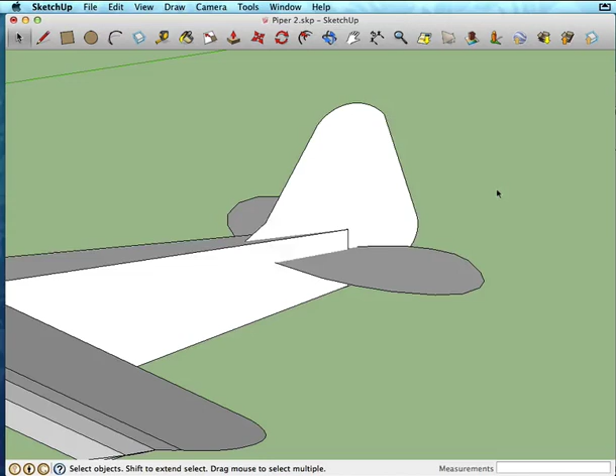In this part, we're going to finish up our tail section here and hopefully have time to do some basic unfolding or flattening out. So let's just get right into it.

I'm going to use the Spitfire's tail design as inspiration for this, where I'm basically going to have the hinge line run right along here, and I'm going to have this relief cut area to allow the elevator hinge area to run through here.

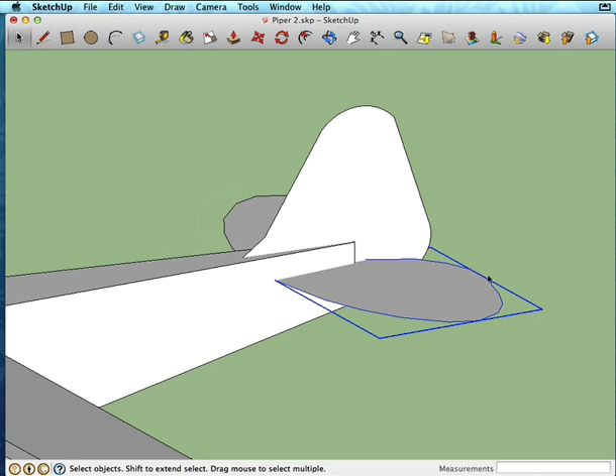Looking at the way the horizontal stabilizer kind of links in with things, I'm going to try and emulate that as well. That should make it a little easier to actually build this particular model once we're done with the plans. So first I'm going to go ahead and divide up the tail.

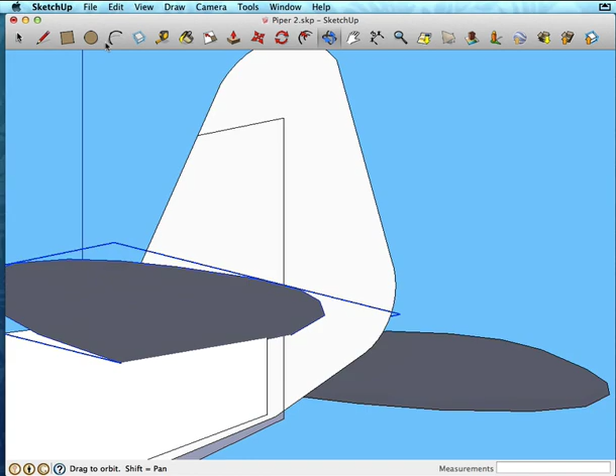I'm going to want to run my hinge line right up along, let's say, that area, and I'm going to bring this straight across to that edge. Now I'm going to make a reference mark here right above, and take it down, so it's going to be right below that elevator area.

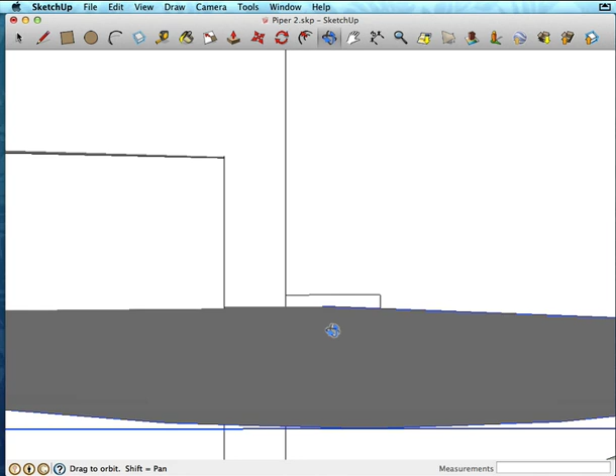While I'm here, I'm going to go ahead and use this hinge line to try to line up the hinge for my elevator. We're going to say that it is going to line up right about there, and go all the way to there.

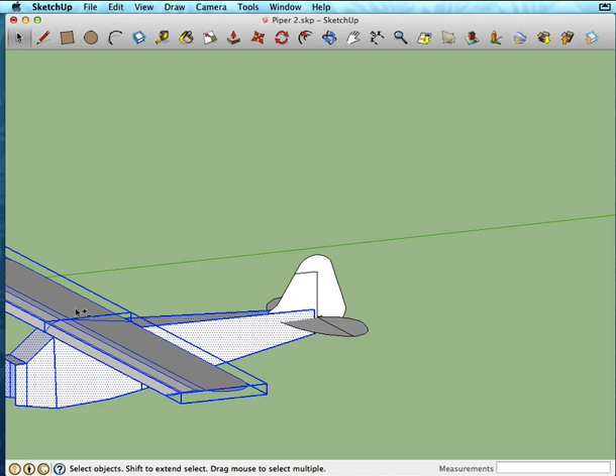Now let's go in and refine that. So I'm going to select everything except for my tail assembly. Actually I've got those in groups, so let me just select these guys and hide them. Now I can focus on this.

I'm going to actually hide my horizontal stabilizer here. Let's split that. Actually, before I explode that, let me hide it. I actually want to make that line here in the component, so that it goes all the way to...

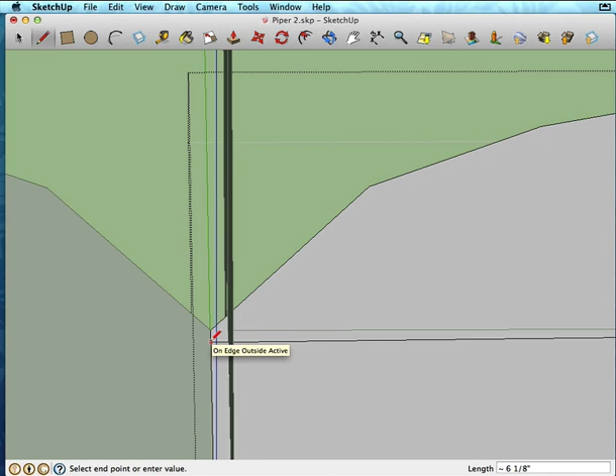Actually, looking at where I've got that split, I'm going to revise that shape a little bit. So let me get rid of that, and I'm actually going to pull this further back a little bit.

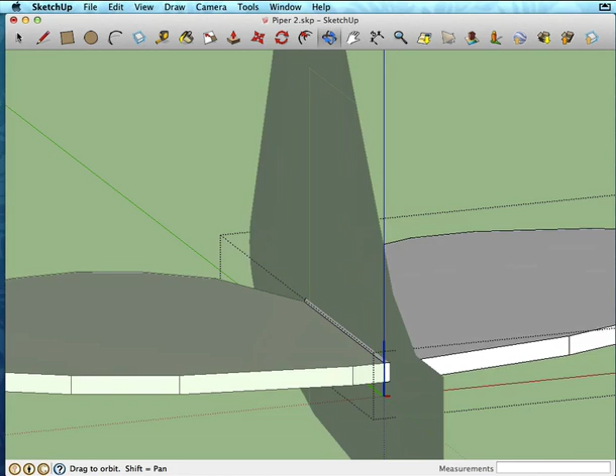Let me just pull that up so I can easily hide this, and then just kind of scale this side panel for my needs. Let me pull this back here to about... that looks good.

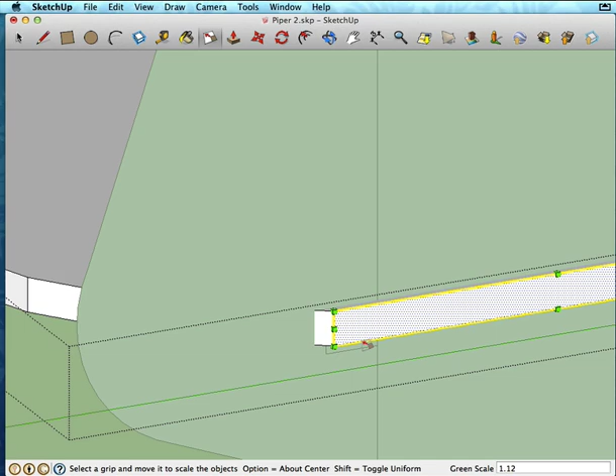And now that I've got that scaled, I don't actually need this geometry up here, so I'm just going to kind of get rid of some of these extra lines.

There may be times when you're designing your model that you'll find it hard to manipulate a certain facet or area, and it can be helpful to just go ahead and pull in some geometry using push-pull to get some thickness to it, which gives you a bigger, easier to manipulate area.

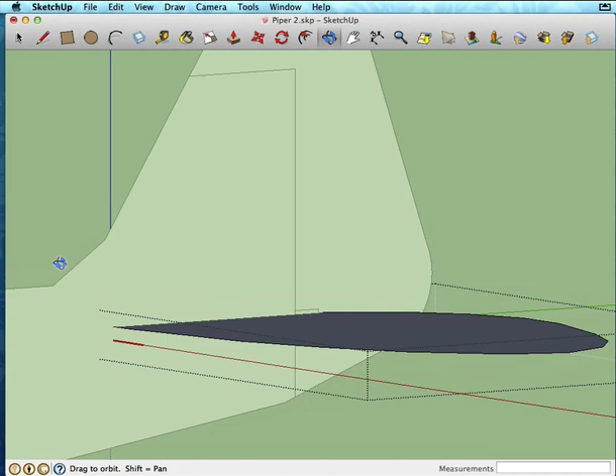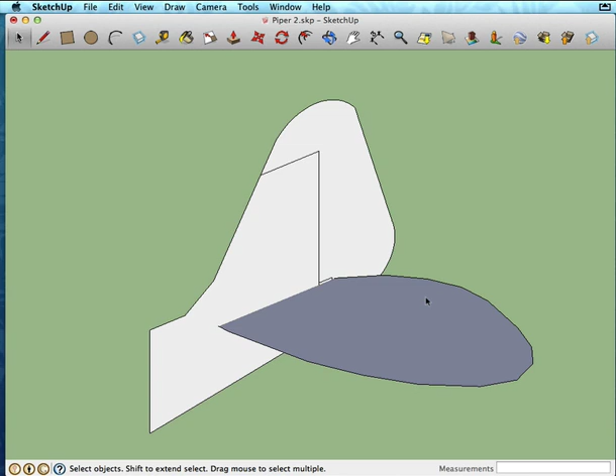You'll also find that since we are designing an airplane, there may be times where you've designed a particular part and it looks good in the plans, and you've got it printed and cut out and built, and it doesn't quite work as well. This is an iterative process, so you'll have to come back, make little tweaks and revisions, and perfect your design as you go along. But hopefully we'll be pretty close with our first shot here.

Reverse faces there. All right, so that gives me a little bit more material in the rear area of my hinge line. Now I'm going to go back in and redo that hinge, pull up close to that edge.

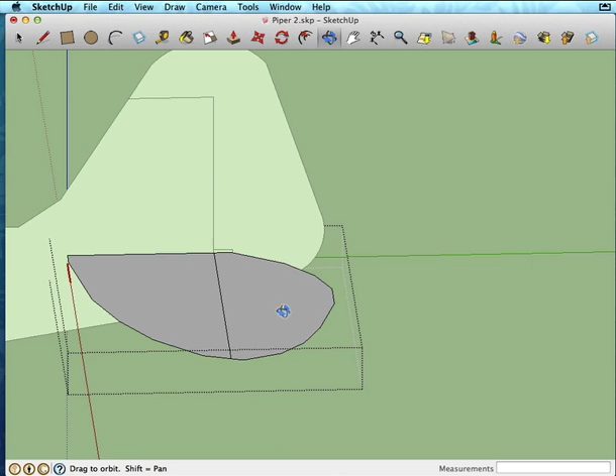All right, now let's go from about there all the way out to our edge. There. All right, and while we're in here, let me hide this one.

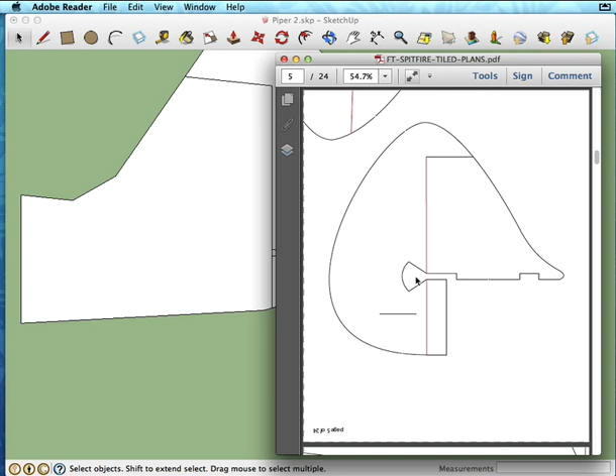You'll notice in David Windestål's design, which is beautifully elegant, he's got this nice little hinge relief area. This basically gives empty space for that elevator to go up and down without scraping along the sides of the rudder, or it also allows the rudder to swing left and right in the notch area of the elevator. So let's go ahead and put in this relief area in our rudder.

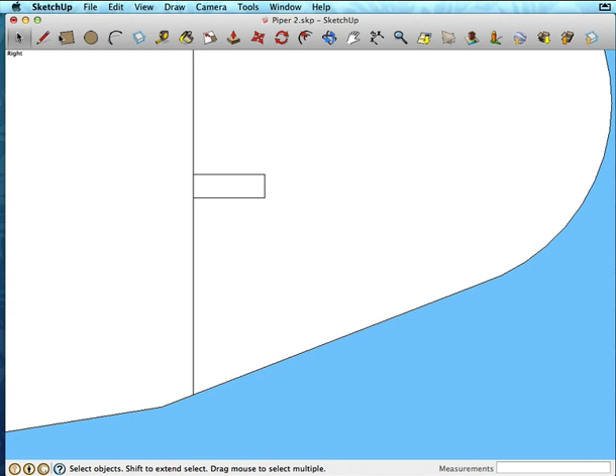So I'm going to go to one of my side views, and I'm going to just pull out about 1/8 of an inch, and I can see that down here in the lower corner as I draw these lines.

And then connect these to here, and I'm going to use an arc to give myself kind of that rounded area there. And I'm just going to kind of pull in my edge here. And once those are in, I should be able to remove these faces.

Oh, and see, now what I've done here is all these lines I put in, they're outside of the group. So this tail is grouped, but the lines, while they were laying right on it, they're not actually intersecting the face.

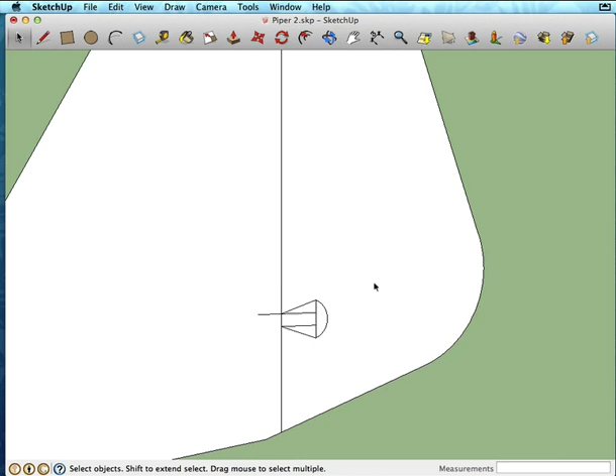Since this is a flat surface and it doesn't have a whole lot of extra geometry, what I can do is draw these on the surface of this group, and now if I explode this group, then basically it's back out of its grouping and these can actually intersect it.

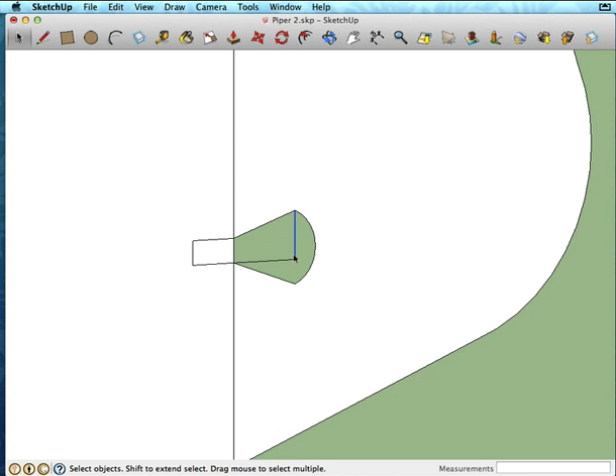So if I were to actually remove these faces, with luck, there we go, we get our void and our hole here that we're looking for. And then I can just select it all and group it back again.

And I may have to make some adjustments once I get my other hinge line in here. I may have to sweep this up a little bit more or whatever, but we'll feel our way through that.

Alright, now let's see here. I'm going to unhide all and see how that looks. Alright, so it looks like it's lining up alright, but you'll notice that if I hide the fuselage...

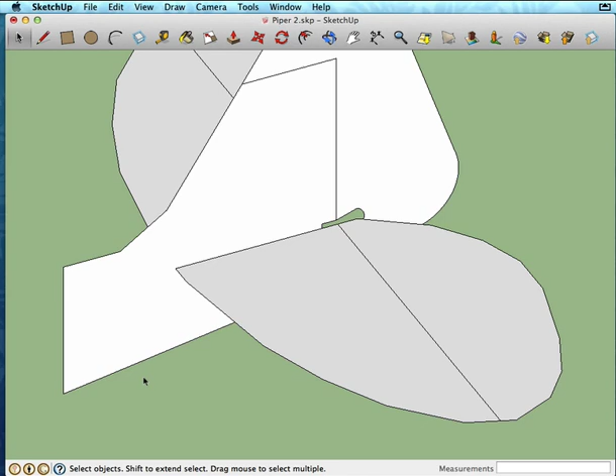...the two sides of my horizontal stabilizer don't line up. That's because right now these are two separate components. I've been using a flipped component so that whatever I do on one side gets transmitted to the other. But at this point I'm pretty much done, I think, with tweaking the overall shapes and stuff.

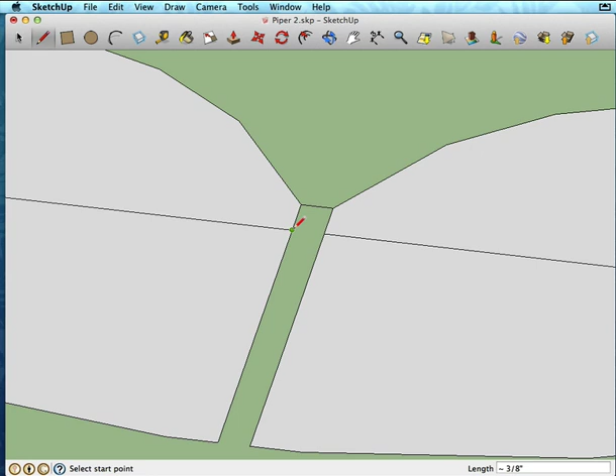So what I'm going to do is break these apart or explode them. And let me hide my rudder for a moment. And I'm going to go ahead and connect these so that they are one piece. There we go. I don't need these lines, but I will need that.

Alright, with luck, this won't be too thin. Let me go ahead and just move this back, whoops, along this axis just a little bit, because I think that's going to need a little more material than what was there before to strengthen that.

Alright, now let's see if that makes us have to change our tail. Ooh, that's cutting it close.

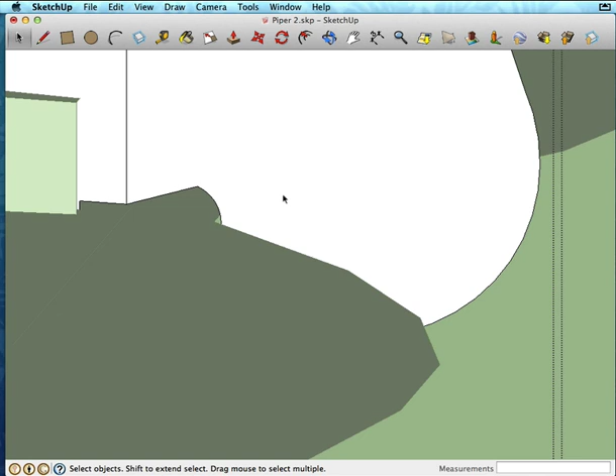So what I think I'm going to do is just go select this, see if I can scale it up. And move it back just a little bit.

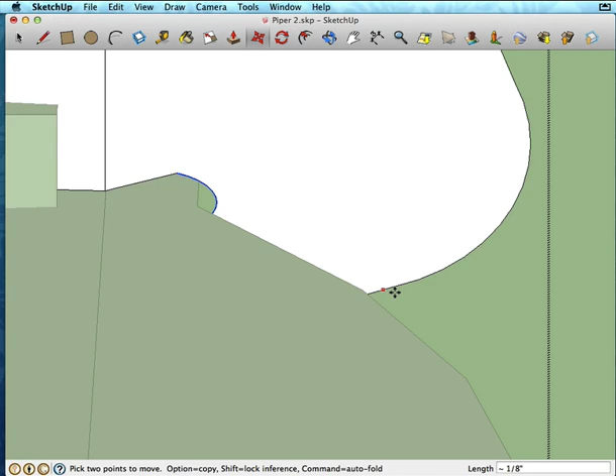Well, that's a little too much. Let's bring that back in. Alright. We'll see if that's enough clearance.

Should be pretty close, because, again, this elevator, this is more of a trainer-style airframe. This elevator is not going to be doing a bunch of large sweeps. So the degree of this angle should be plenty to allow this thing to fly well.

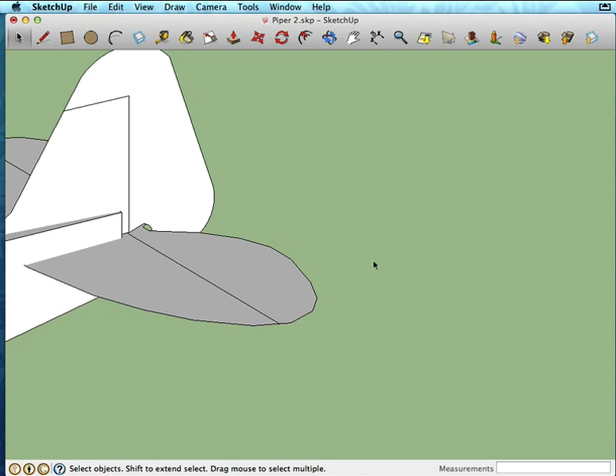Alright, so at that point, my hinge lines are all put in. And now I'm ready to try and create this notched assembly structure, kind of the way that David did over here. You can see he's got a slot for this notch on the vertical stabilizer, and these notches here on the side of that go into the back of the fuselage. If I can, there we go, locate that, it's back here.

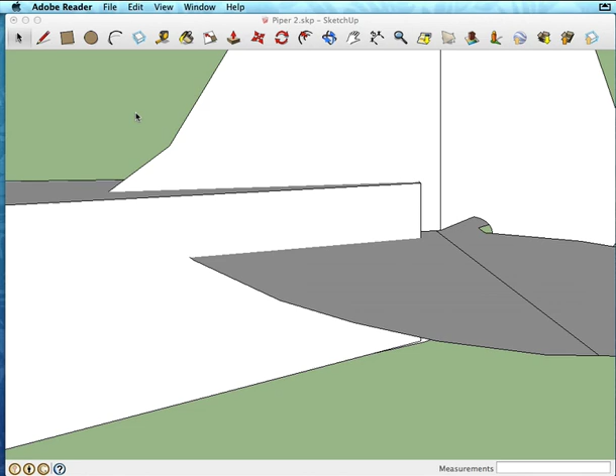So we're going to try and do something similar to help anchor and strengthen this rear assembly. Alright, so we know for a fact that we're going to end up cutting out part of this top of the fuselage. So I'm going to...

...kind of use some, I'm going to go ahead and group my horizontal stabilizer. And I'm going to group, that's already grouped, my tail's grouped, good. So those are separate. This way I won't have lines that might accidentally interact with each other.

And we talked about this in one of the earlier tutorials where we were talking about the difference between grouping things and having things just as shapes and faces and edges.

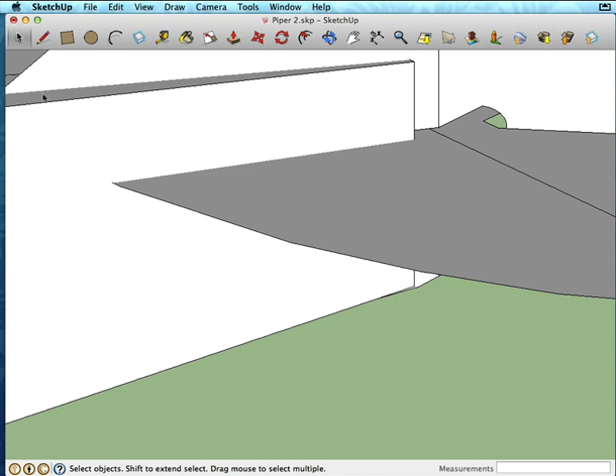So what I want to do is divide up this fuselage, but I want to kind of make sure that I'm putting the division lines at the proper point. So I'm going to go into this and pull out basically the thickness of the foam core. So I'm going to pull this out to 3/16.

Alright, I'm going to end up removing this geometry afterwards, it's just kind of for my reference. You can see it actually kind of pulled down into there, but that's not a problem, we'll be able to correct that. But now I know exactly where I need to put that line on my fuselage.

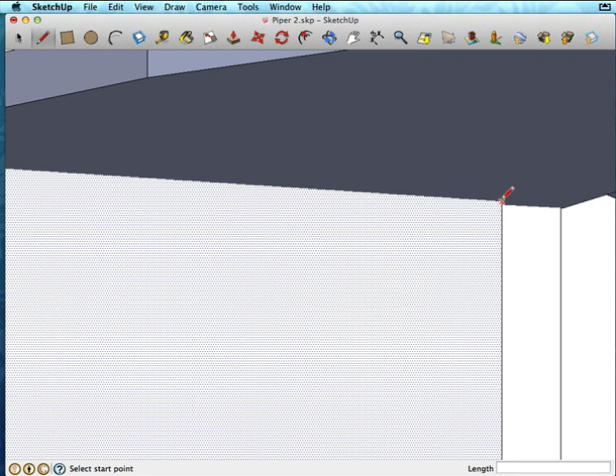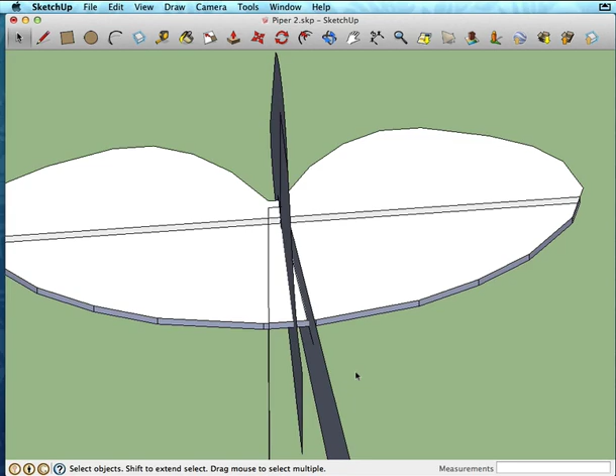So let's go in here and we're going to pull it right along. I know that this kind of goes forward a little bit, so I'm going to go a little bit out here. And let's see here, what if I hide that? There we go, now I can see exactly where I want to bring this line.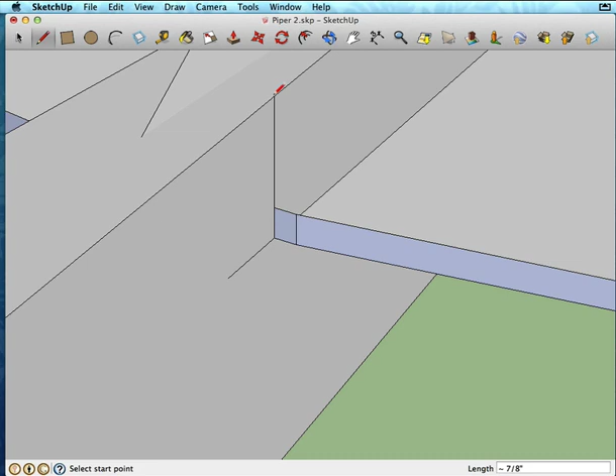Alright, so it does go straight across at that point. Good, so I can just use that as my corner here. And I'm going to go straight up the blue axis to that edge. I don't need this. And bring this straight across, come down from here right to that edge, and then take that all the way out there.

Alright, so now let me hide this. Now I should be able to go in and remove these extra edges.

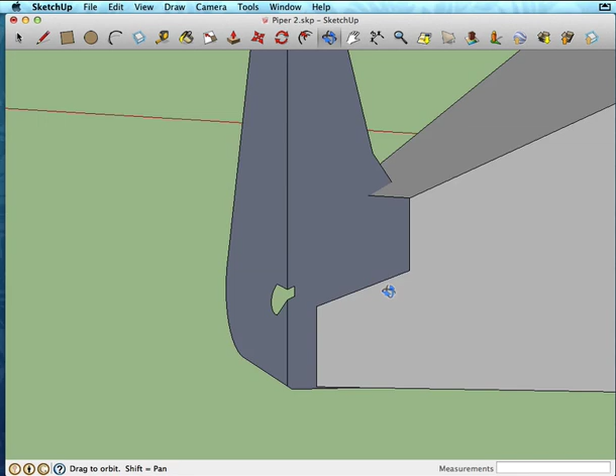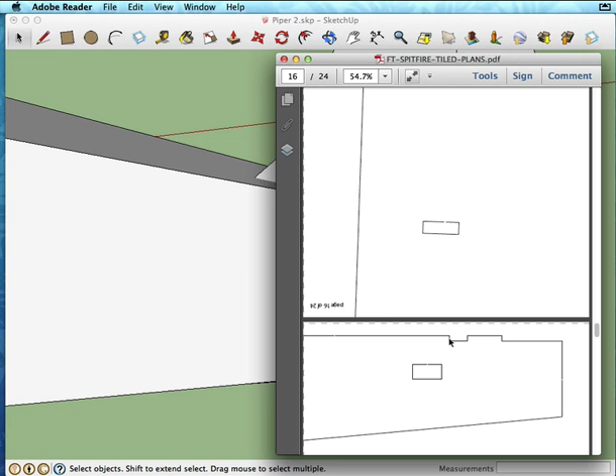Alright, now I've created a nice little notch for my horizontal stabilizer to sit, but we do need to build up our little anchor notch that we have here, and that is what we're seeing on this part. So what I'm going to do is, in my design, he's basically got it recessed so that the thickness of the elevator sits down this much into it. Ours is a little deeper just because of the placement of our horizontal stabilizer. So I'm going to design a notch that comes up and bites into the horizontal stabilizer to hold it.

And to do that, I'm going to see if I've got about an inch worth of space here, and I'm just going to say I'm going to start it there, and let's see, oh, I got plenty of room. So there's an inch, I'm watching down in the lower right corner. Alright, and so now I've got an inch segment with endpoints at each spot.

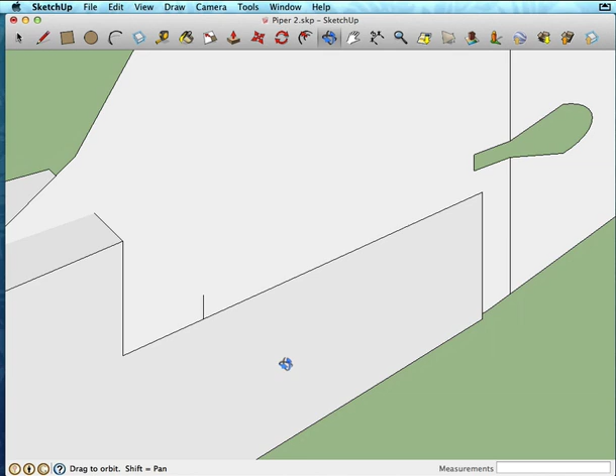So if I come up 3/16 of an inch, which I know is the thickness of my foam core, and come over and then down. Oh, I was not on the right plane as I brought that across there. So let's do this, I can just start my line from this point, come straight up 3/16, and then connect those two. There we go.

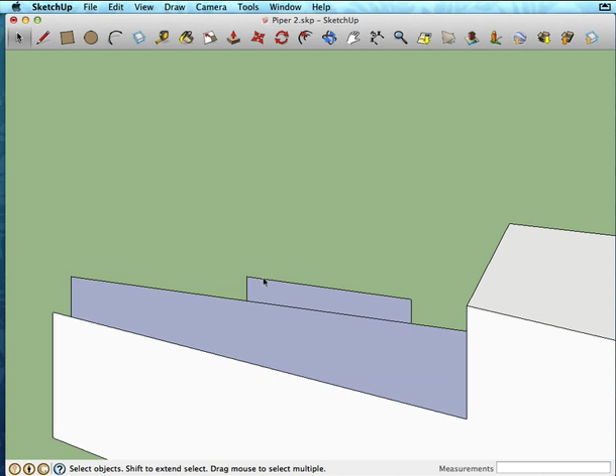Alright, and I'm just going to use an inference line across this to put my other notch in on the other side. Now theoretically, since this is a symmetrical airframe, I could really just design one side of it, and then once I unfold it, just copy that and flip it so it's a mirror image. But just for the sake of practice, I'm just going to go ahead and put this notch in on the other side, and I'm going to use, actually let's do it this way.

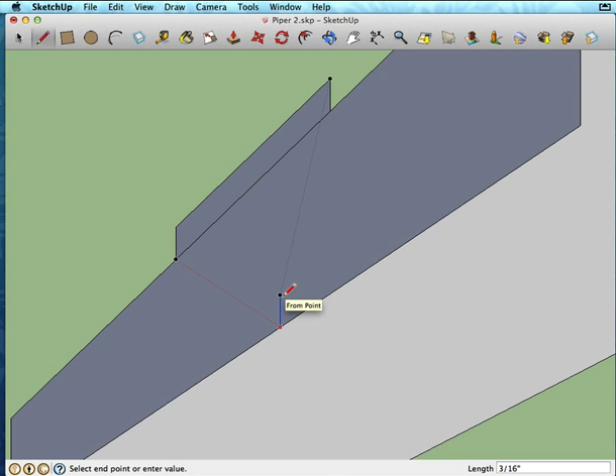I'm going to use an inference line rather than drawing an actual line. So I'm going to take my line tool, hold here for just a moment, which basically tells SketchUp I want to infer something from there, and you can see I've got this dotted red line. That lets me pull out and then up 3/16, telling it I'm going to infer from this line across the red axis to here and come up 3/16 and connect them. So now I've got my tab on both sides, and I don't actually need this, so I can get rid of that line.

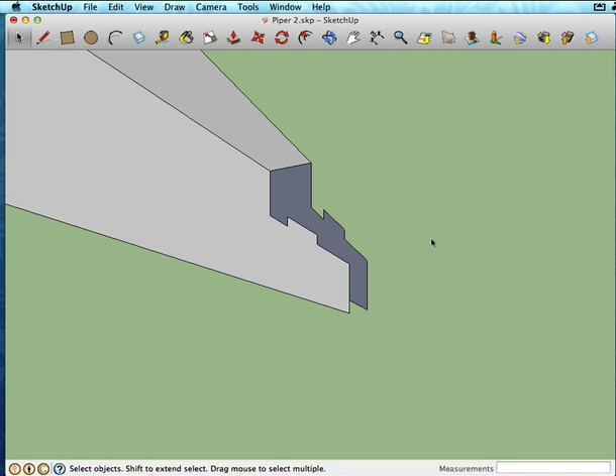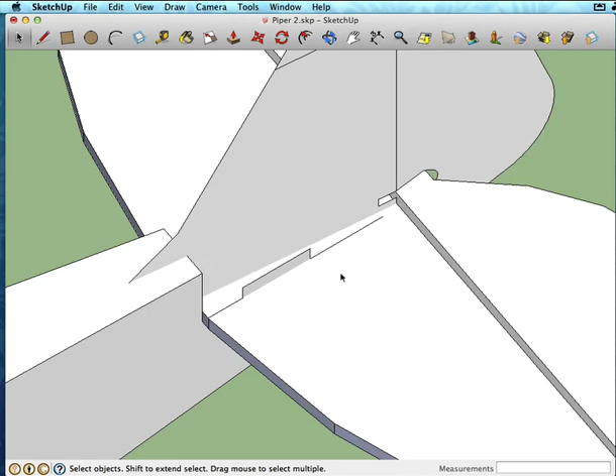Alright, now I need to make the corresponding slot in my horizontal stabilizer, so let me unhide. Oh, let's go ahead and unhide all, it looks like. Alright, now let me hide my tail for now. Alright, so what I'm going to do is I'm going to go in and take this back up. Since I pulled down this geometry to use as reference, I can actually just pull it right back up to that same plane and it gets rid of it.

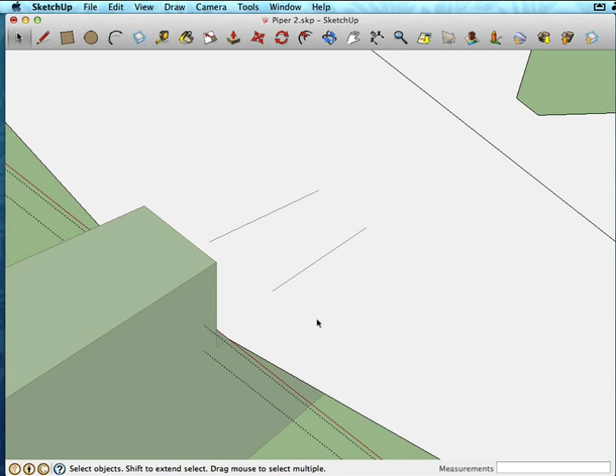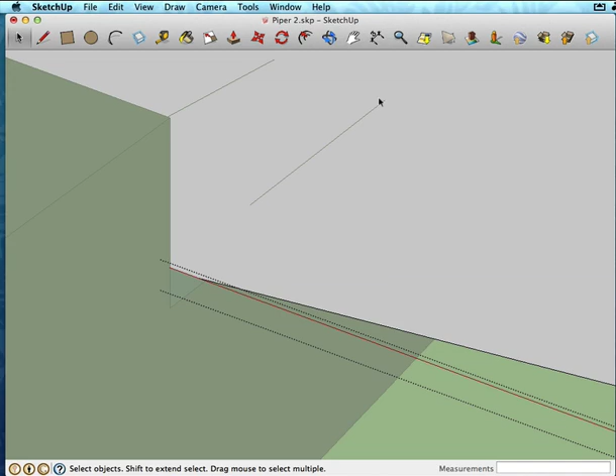Alright, you can see I'm just touching the top edge of that. If I'm looking at this and imagining that I've already got the thickness of this foam core in the horizontal stabilizer, I'm just going to add my little notch so that it would align to that, and I'm going to add it inward. So this is going to be the external surface of my fuselage, and instead of the foam core coming out from that, it's going to be folded over so the thickness is internal to the fuselage. That's why I'm taking my notch from here and going inward to make the square for it.

Alright, so to do that, let me use this as my reference, and I'm going to draw both exterior edges first, and then I'm going to draw... let's see here, thinking about what would be the best way to pull this off if it's going to be right at the angle.

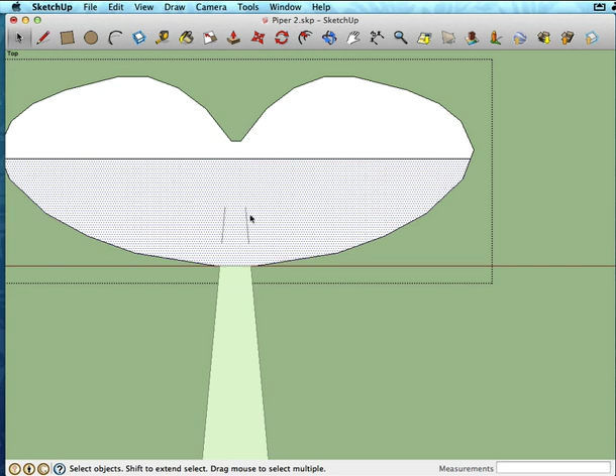Let's do this. I'm going to go to my top view, and since I know that this is a 1 inch line here, and I know that the thickness is going to be 3/16, let's just draw a square that is that size, and I can rotate it into place there.

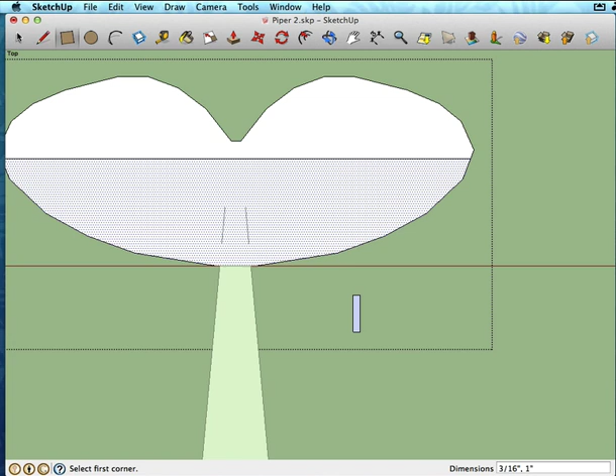Alright, so you notice that when you draw squares and so forth, you get these dimensions down in the corner. Well, you can actually dial those in. So if I draw this out, I can say this is what it was when I released it, but I can change this to be, okay, I want this to be 3/16 of an inch wide by 1 inch. And when I hit return, that actually punches those dimensions right into the shape. So when you want to create something that's a very specific size, you can specify the size by punching it in after it's created.

For instance, if I had a circle, right now it's got a radius of, or a diameter of 3/16 all the way around. If I go like this, I can change that and say, okay, I wanted it to be 1 inch, and it would set it to that size. Alright.

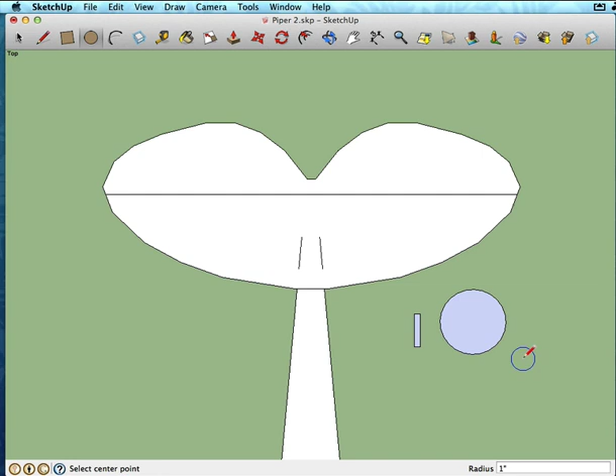Bring that back in there. So what I'm going to do now is select this and group it for a moment, just to make it easy to move into place. And I'm going to move it right up onto that edge so that it's sitting up there, and bring it right up to that corner, and then rotate it by that same corner so that it lines right up there.

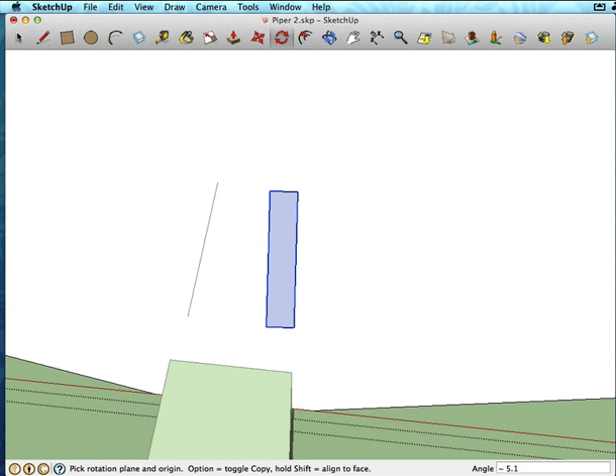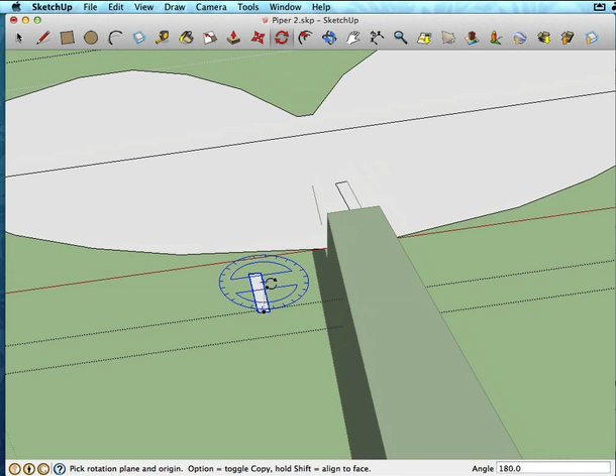Alright, so I've got my box here, and I'm going to duplicate it across, and I'm going to rotate this one so that it lines up. So I'm going to rotate it on the green axis, flip it all the way over, and use it to go back here. So I'm sort of using this shape as a cookie cutter to basically press my shape into there.

Alright, so now if I explode this, and explode that, and explode that. So now basically the cookie cutters have cut into that area, and they're on the correct angle and so forth. So if we were to see what this looks like, if I go ahead and... whoops...

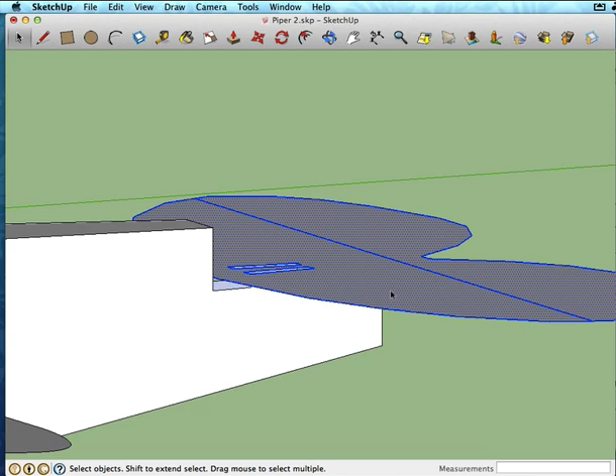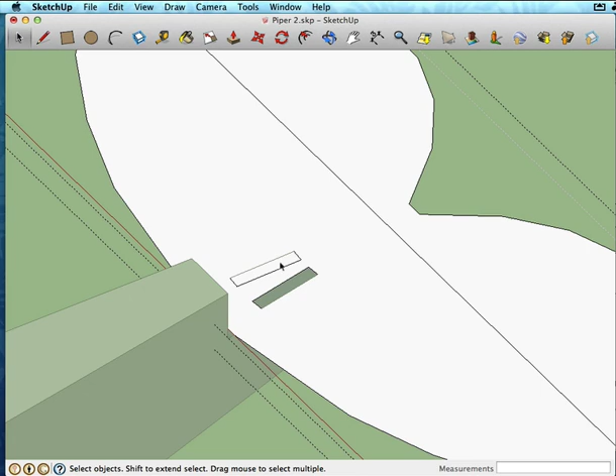Oh, I had that stuck to it now, so let me go back a few steps before. There we go. Alright, so before, I don't actually want to ungroup it all the way. I just want to go in here and ungroup my little cookie cutters. So let's explode those. And then there. So I can see that I'm still grouped within here, so my tail geometry is not intersecting and interfering with my fuselage. They're still separate. There we go.

Alright, and just to kind of see how that's going to look, if I go in here, I can pull down some geometry, and I can see that it's basically going to just slot right into those. So here we're sort of seeing an X-ray view of how those slots are going to work. Alright.

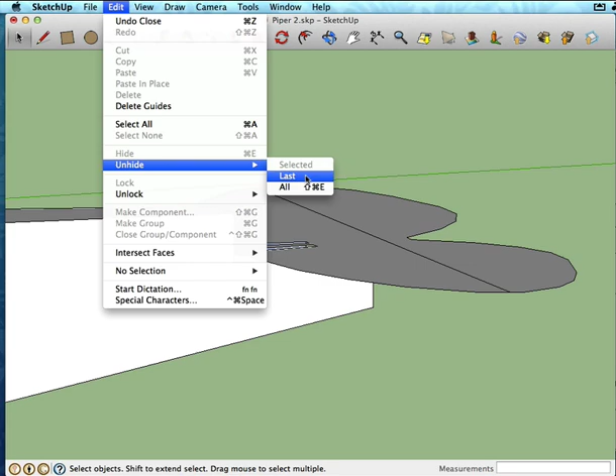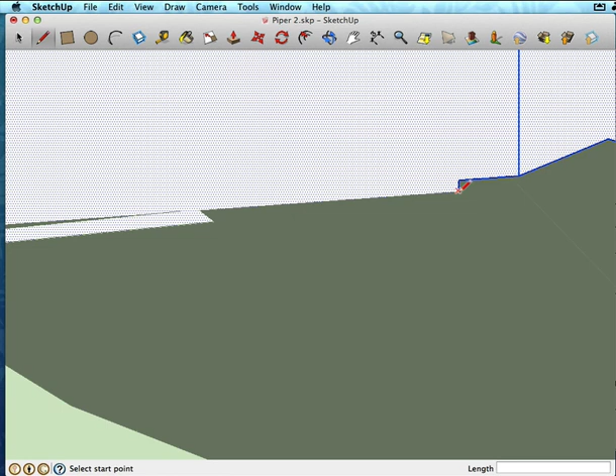Now I'm going to need to modify this rudder here. So let me unhide all, because I need to design it so that I can have my tab come down here. So I'm just going to make a quick little reference mark on my rudder.

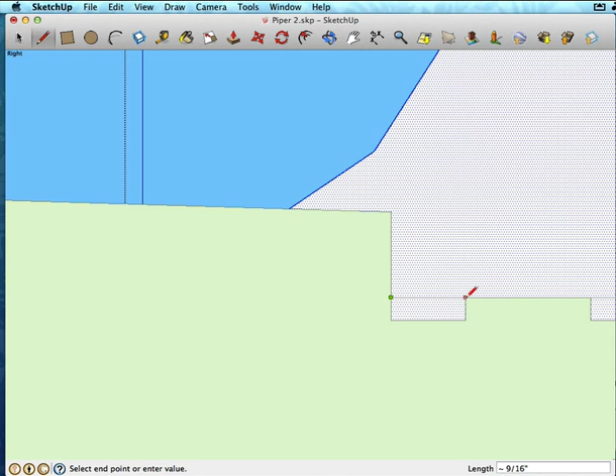To tell me about where that's going to be. And let's go to the side view while I'm at it. And I'm just going to kind of use this to mark out on my rudder where this area is defined. Alright, for the fuselage.

Alright, now I'm going to go ahead and hide my fuselage, and make it a group and then hide it. There we go. Whoops. And make sure I get the whole thing selected before I make it a group. And then hide it.

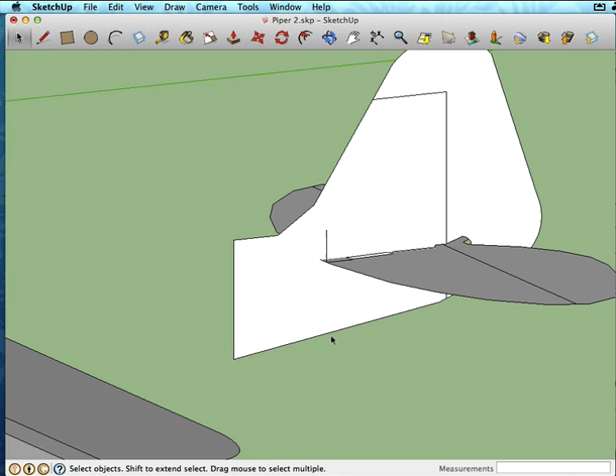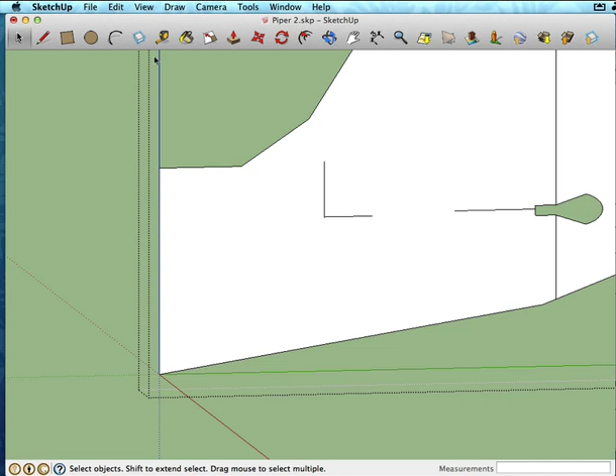I don't think we're actually going to need this bottom area once we get all of our notches put in. I'm going to hide my elevator there. So what I'm going to do is draw this straight across there.

I know this is going to be the surface of my horizontal stabilizer, so let's say we're going to have a notch that's 3/4 of an inch long, and we'll come down our 3/16 and go right up there. I can go ahead and continue this all the way across.

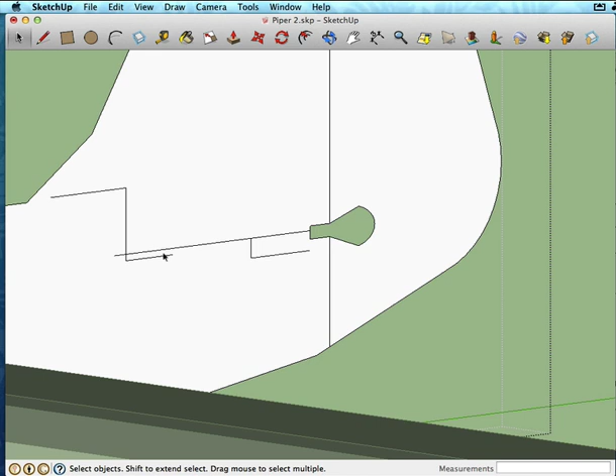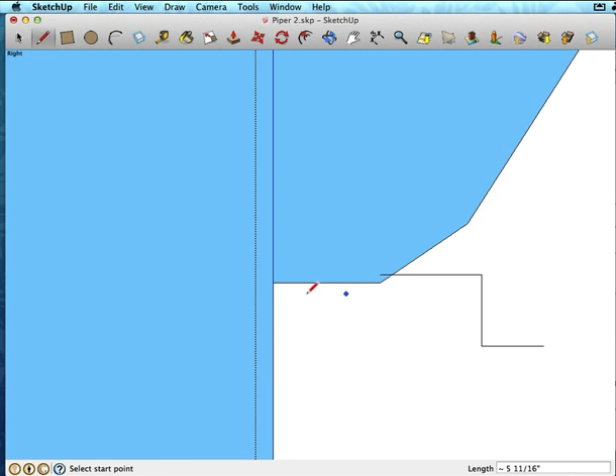That's why it's throwing me off. I had drawn those lines on a different plane. No pun intended, it just makes me giggle every time I say it. Let me just draw these a little oversized here, and then I'm going to adjust them. I don't need these that were just floating off into space.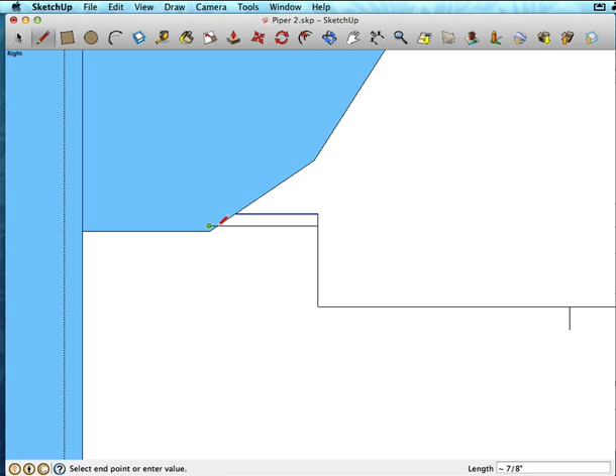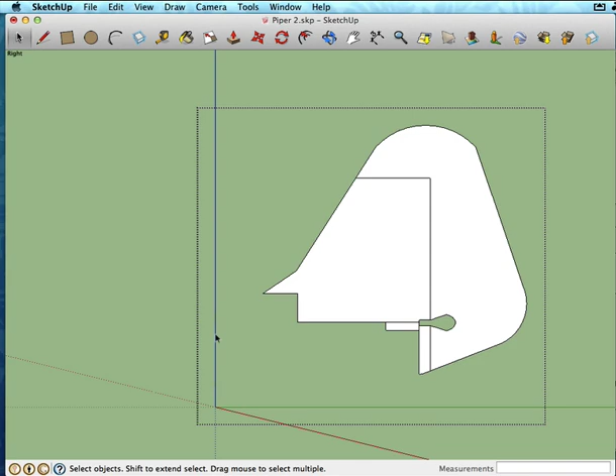Now let me go back here and put in our notch. I'm going to bring this down, get rid of that. Now I'm going to shape this down just a little bit.

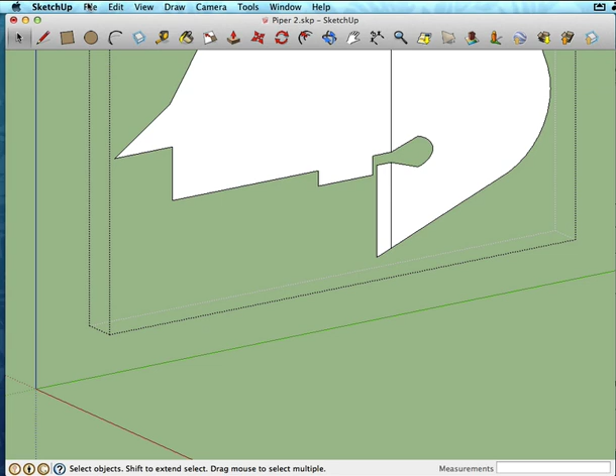That should give us that notch. Now if I unhide all, I can see I've got my notch here. We may be able to move this notch forward or make it a little bit bigger, but for now, or that tab, I think that'll be fine.

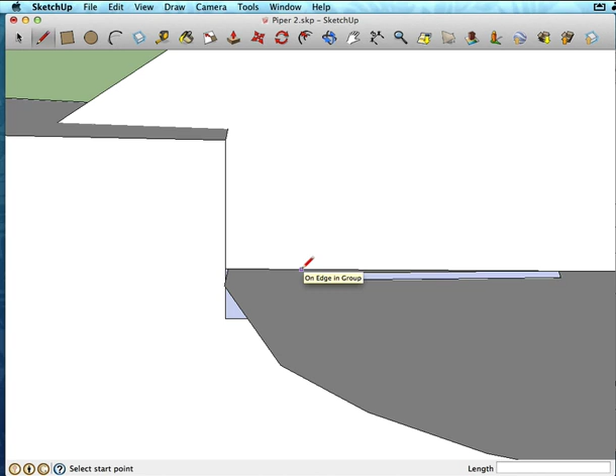What I am going to do is put a bit of a downward notch here in the front of the fin, or the rudder. I'm just going to add a little segment there for reference. Actually, let's bring that a little closer to those other notches.

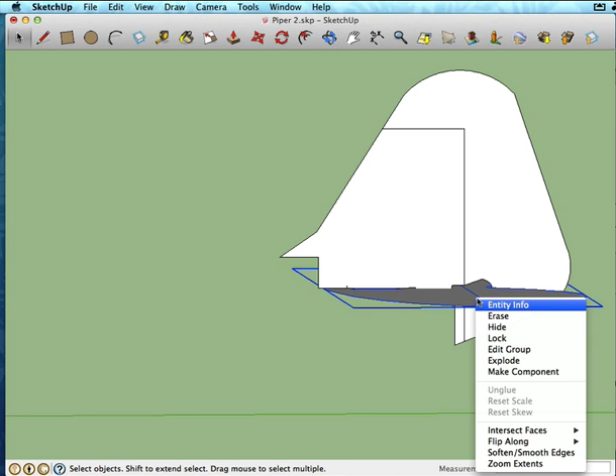Let's go ahead and hide that, and I'm going to bring this down that full 3/16. Go over to here and pull that up. Oh, I'm doing this outside the group again, so let me go into the group and make that — that will work a whole lot better. So down our 3/16, over to here, and up. There we go.

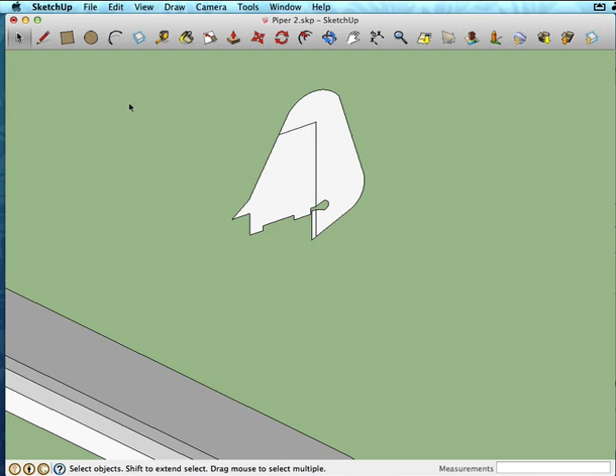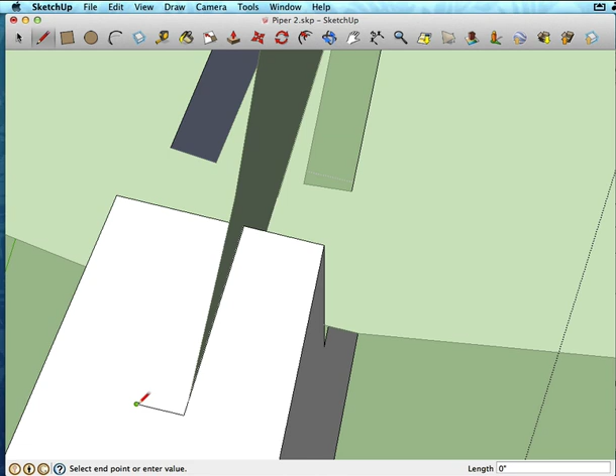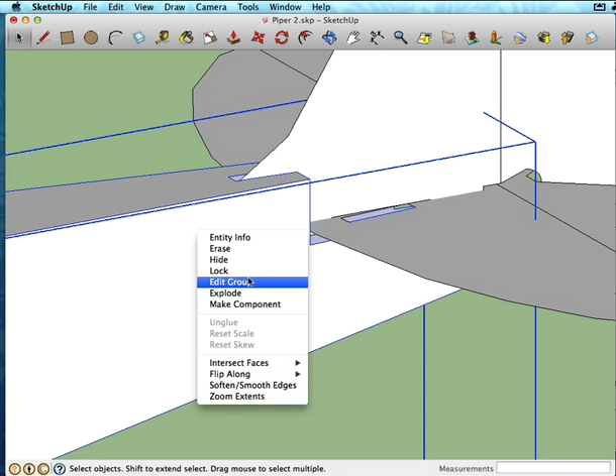3/16 of an inch wide, and up. That should allow us room in there. What I'm going to do is pull more of that vertical stabilizer down into that notch, so that notch gives a little bit of place where we can put some hot glue and grip in our construction. I'm just going to go ahead and connect that to there.

We'll see if that works out when we go to build it. So at this point, I'm pretty happy with my notches and my tabs to hold my tail together. We'll see how it... oh, actually I need to add the hole for the vertical stabilizer.

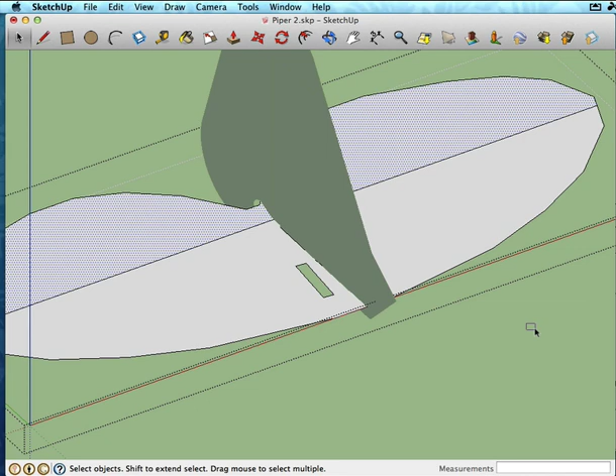So let me put my line in there. Let me hide this, go to my top view. I know that this is going to be 3/16. Looks a little bit off center, but we'll see.

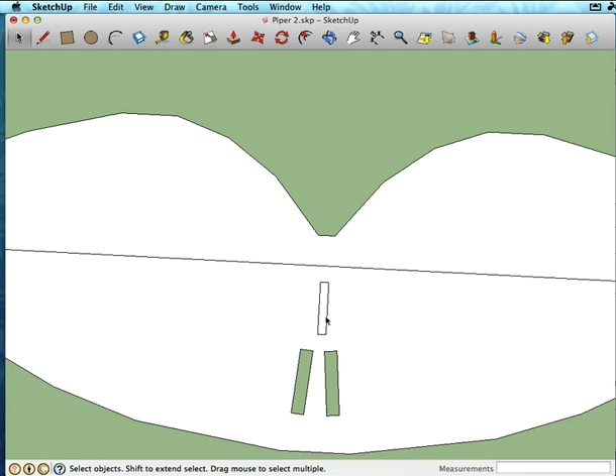Again, I made that outside the group. Let's try again. Hide that, now go into the group. I'm going to come off 3/16, go 3/16 in there.

We'll see how close those go. And save — I'm now saving, because I don't want to lose all this work.

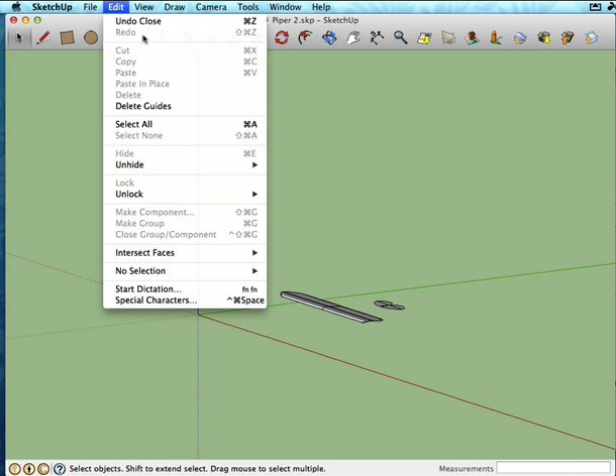Now, if I go back out and unhide all, there we go. I think we're about ready to unwrap. I may go ahead and put that out as a separate episode so I can call this one done, but don't worry, I'm going to try and get both these episodes out about the same time.